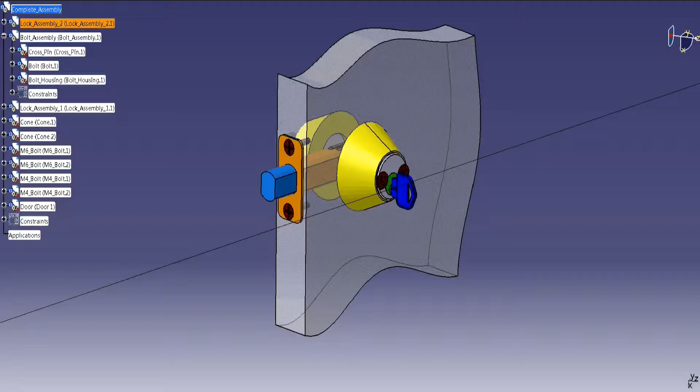In 1861, Linus Yale Jr. patented the pin tumbler lock, which remains in use today. This is a fully assembled pin tumbler lock. In this frame, you can see the lock being disassembled from the door. First, we have the lock screws, the actuator screws, the housing cone, the cylinder, and finally the bolt.

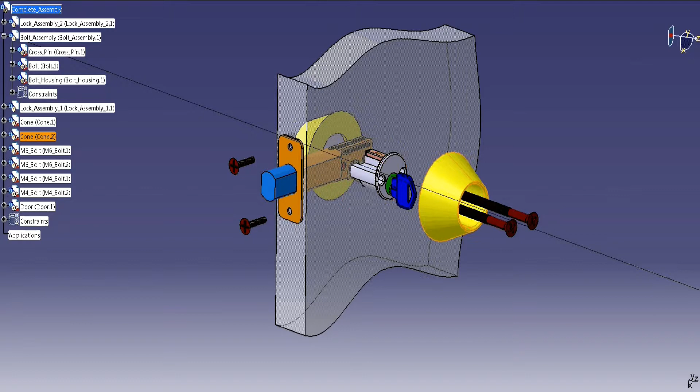In this frame, we see the cylinder, and the cylinder is the outer piece of the lock that houses the upper pin chamber. As the pin cover is removed, exposing the springs, the cylinder, and the plug, you can see the pins as well.

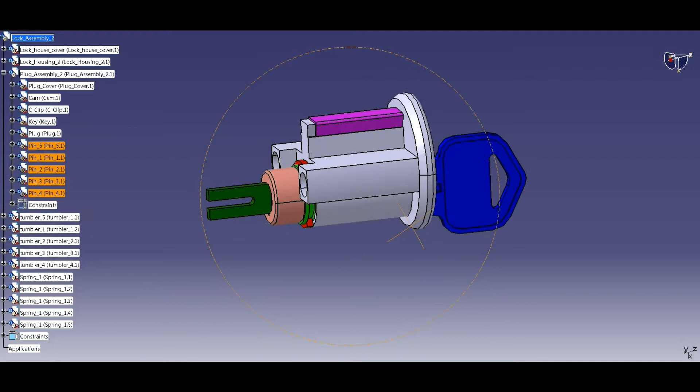Right now, I want to break down each portion of the lock and explain what it does. First, we have our tumblers, and the tumblers are the key pins that are touched by the keys, and they are sized differently, corresponding to the different depths cut in the key.

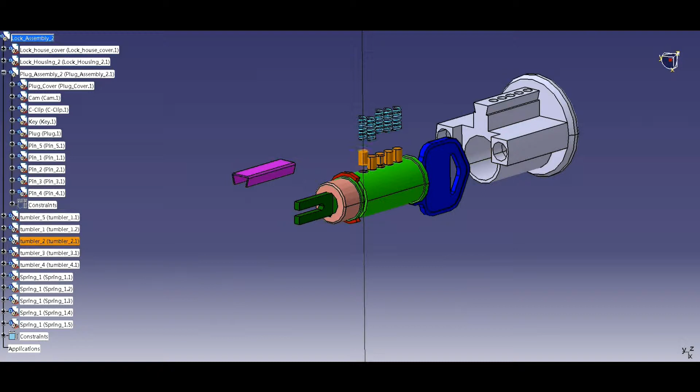When the correct key is inserted, all the key pins will be aligned, creating what is called a shear line, allowing the plug to rotate. Next, we have the pins, placed between the tumblers and the springs, and in their resting position, the pins block the rotation of the plug.

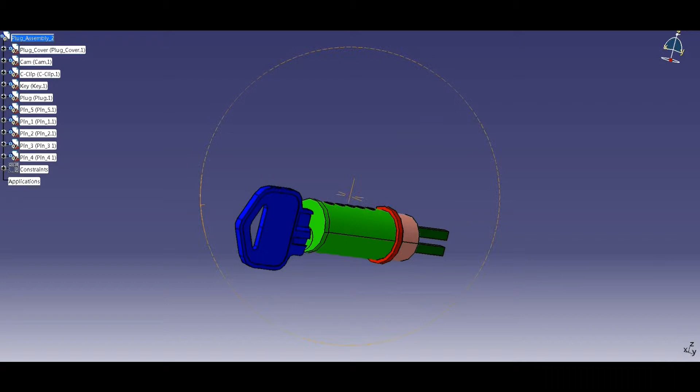The plug is the inner piece of the lock that rotates upon insertion and tension of the correct key. The plug is connected to the cam to actuate the bolt mechanism when rotated. The cam is an extension connected to the back of the plug, which actuates the bolt mechanism to lock and/or unlock the door.

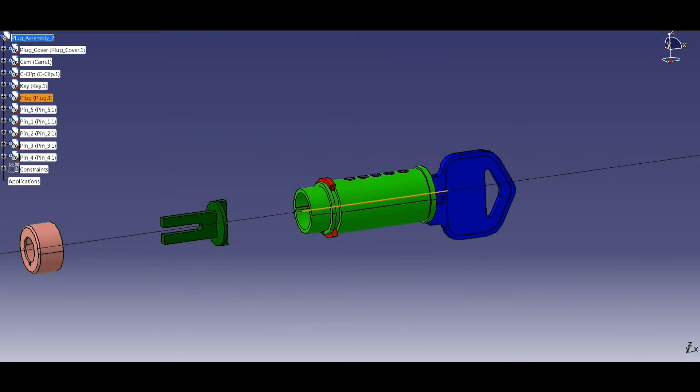In the frame, we see the plug and the cam being extended, the fork-shaped end of the plug. We see the key, and we see the tumblers that sit on top of the key. We also see the C-clip or C-Clip that helps lock the plug into place.

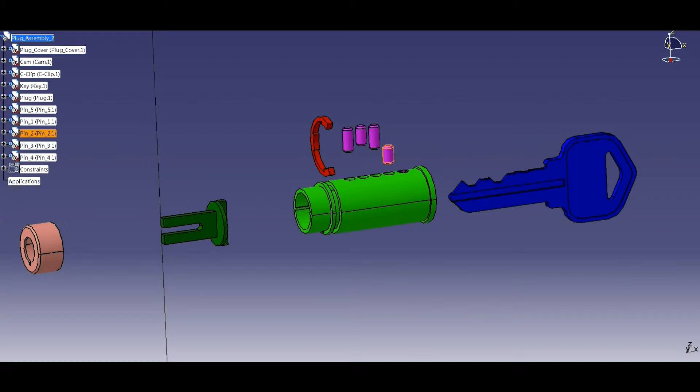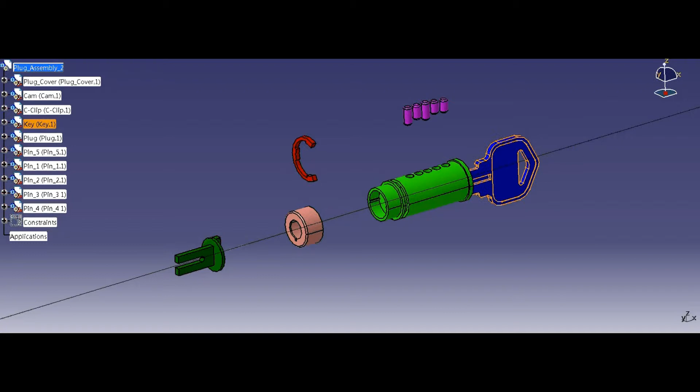Fully disassembled pin tumbler lock. Now in this frame, we can see the reassembling of the plug, the cam, the tumblers, and the C-Clip.

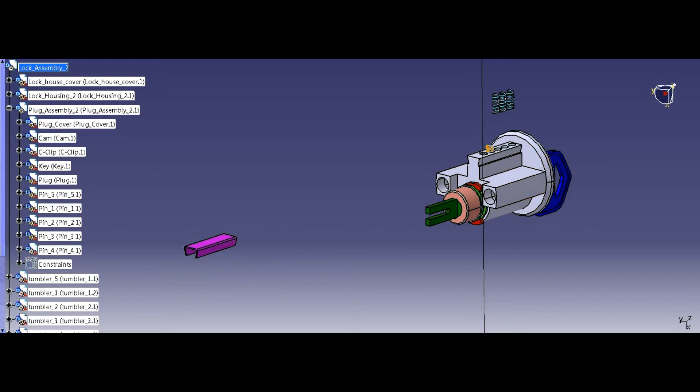We have the reassembling of the plug back into the cylinder, the C-Clip, the pins going into the cylinder and the springs, and finally the cover being administered.

In this frame, we have the fully assembled pin tumbler lock being reinserted back in the door, starting with the bolt, locking bolt, the cone, housing cones, the cylinder, and the screws.

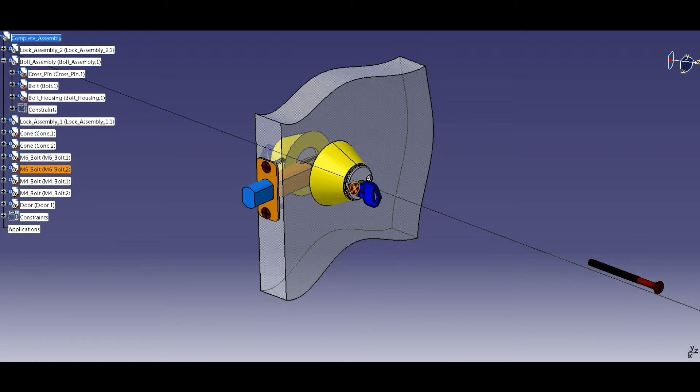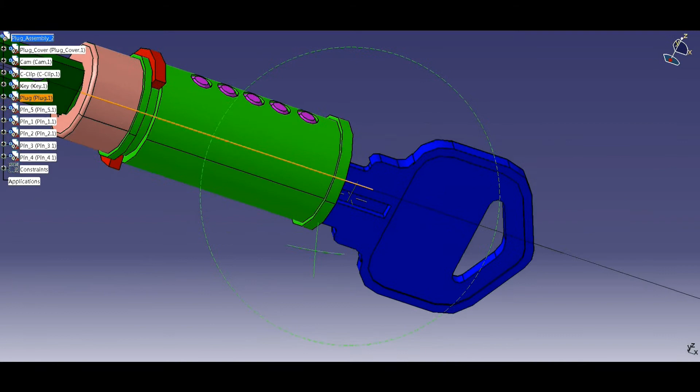In this slide, we wanted to show some of the design features of the pin tumbler lock, which makes it a pretty remarkable design. We see the key being inserted into the plug, and how the pins are sloped or machined to have a slope, so the metal slides clearly back and forth over the pins.

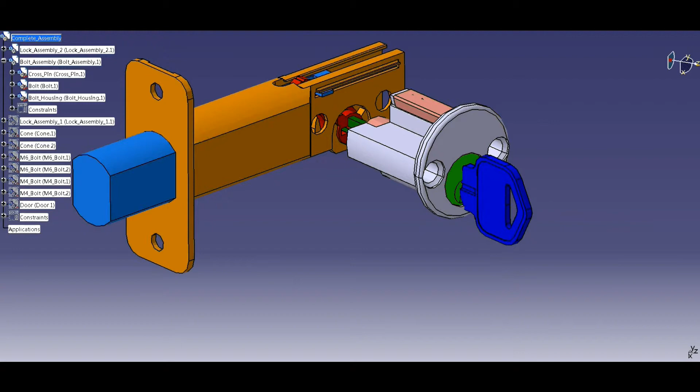The strength and the design of the pin tumbler lock, we believe, is this lever and the groove that is cut to hold the bolt in place and locked, and it can't be moved. The slope of the cut in the lever holds the pin in place from being able to move back when it is locked.

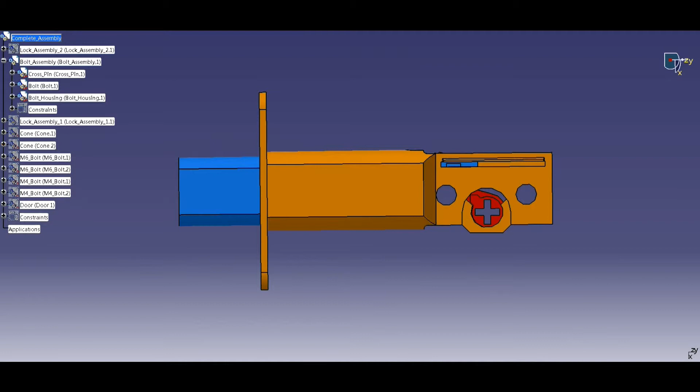This project, we were asked to determine a few questions, and one was to determine how we would open the lock without damaging it if we didn't have the key. Two, to determine how we redesign the lock to make it easier for manufacture and assembly, and to evaluate its strengths and weaknesses. First, we'd like to explain how to open the lock without a key and without damaging it.

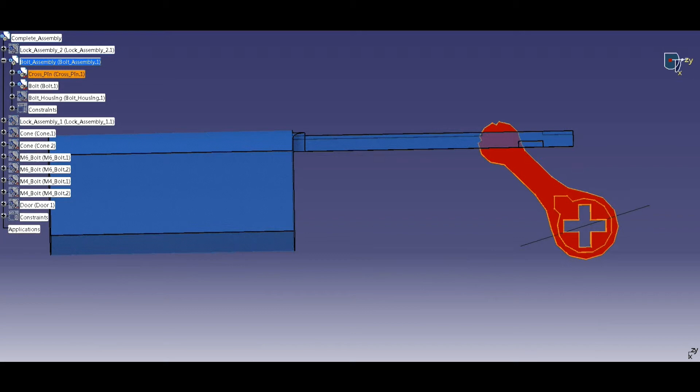That would be by picking the lock. That consists of a pressure wrench to slide in, holding the pins down, and sliding a paper clip or a picking tool to move the tumblers into position.

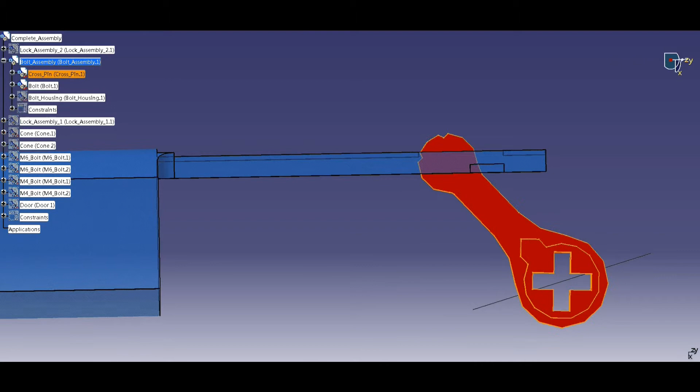Next, we wanted to evaluate the strengths and weaknesses of the lock. My colleagues on Team 7 discussed this in detail, and we believe the weaknesses were: one, the easiness of picking the lock and getting it open, and also the intricate parts, the number of parts inside the lock that made it difficult to reassemble.

We believe the strengths were the simplistic design that has stood the test of time and hasn't varied too much from the 1800s, after it had been patented, all the way up to today's locks.

After discussion of the weaknesses of the lock, we came up with several ideas for how to redesign it. One was to have a cross-shaped key, which would alleviate the problem of picking the lock, which is fairly simple. This would entail pins on each section, 4 corners of the lock, eliminating the ability to pick the lock.

We also discussed the material of the pins, which is copper, a soft metal. We believe making the pins titanium, a stronger metal, would reinforce the lock better than copper.